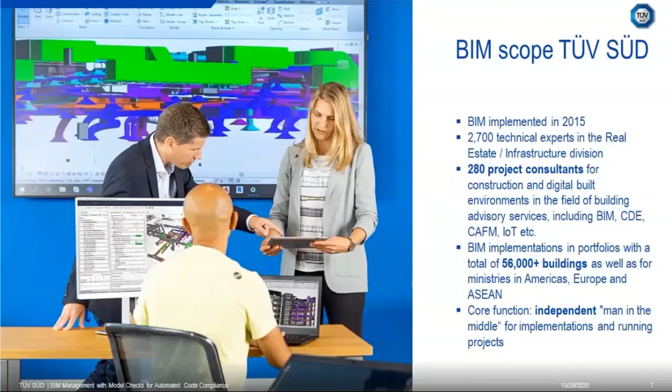TÜV SÜD implemented BIM in 2015, and a couple of you already know our local teams in Singapore and in India. In total, our group joined today 280 project consultants. And the interesting thing is we could really do a lot of R&D, but a lot of project delivery as well for a couple of the 56,000 buildings. And like I said before, our position is really to be the man in the middle. It means that we see ourselves as a knowledge gateway to all stakeholders that are involved in a single project.

And the interesting point is that our finding is that usually projects in Asia, when it comes to the digital quality and risk management and quality items, usually it's, how to say, an unspoken task for the BIM management. And here we see so many questions like what is checked, what are important items for BIM quality, or when a result is good, when it's bad. Also the question, how do I transmit the results to consultant and building owners?

So here's the question, is this a blame game? Like I find errors and I reject taking over the models. Is that really a valid game today? We believe not. So we face the fact that especially in Asia, all this BIM management and these model checking items, they are not standardized.

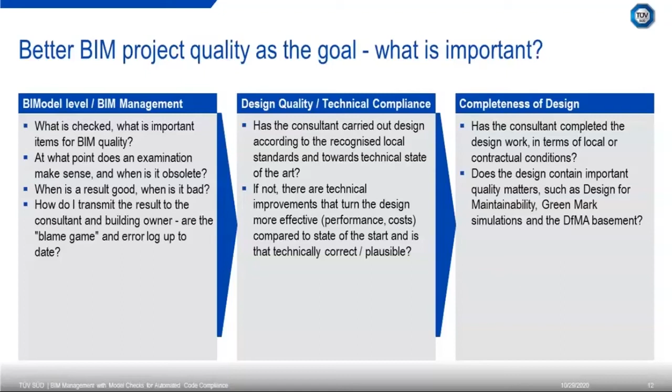So this chart is maybe the most important one in this webinar, because it should really highlight that the BIM is not the most important thing, but the quality of the design and the completeness of design. That's really the most critical aspects in our model checking workflow.

And to bring you some practical projects about why we so much engage on this completeness and design quality level, I brought some projects to you. So one is a sports stadium facility for a $65 million capex, and it should accommodate 12,000 guests.

We came on board during the fit-out phase, and here it was all modeled in different softwares. Explicitly, it was an IFC compiled by 8 different authoring tools. And the interesting thing, we found out that the fit-out design was only 72% complete.

And we found some performance errors according to Aircon and DFM. So this check was very important for all: for the building owner, for the previous consultant, for the current consultant, because with this fast check, which took like 10 man days, and some automatic checks, we avoided some financial harm for all the stakeholders.

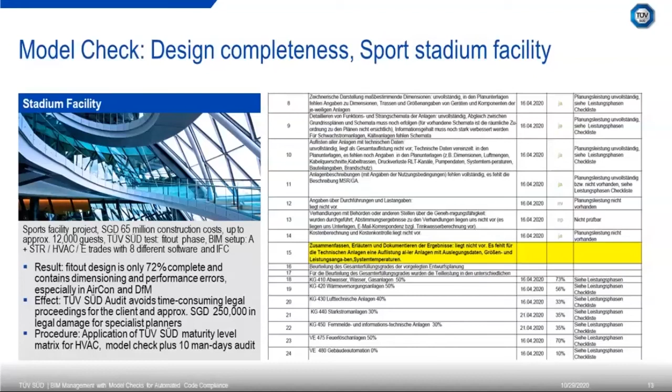And that's really a cool point, because usually for such big projects we would need over 2 or 3 weeks, right? But in a couple of days we could already highlight some of our findings, and we could guide the previous consultant in the right direction about what is completed, what's not completed, and so on.

And another one is a residential building. It's a smaller one, 3 apartment assets with 5,000 square meter GFA, like a chalet style, and that was in native Revit models, then converted into IFC. And here the finding was that with model checks, like you can see on the right side, we found so many layout errors that are not compliant to the local standards, so we helped the consultant with very immediate advisory about what to improve to have a design that's really compliant to local standards.

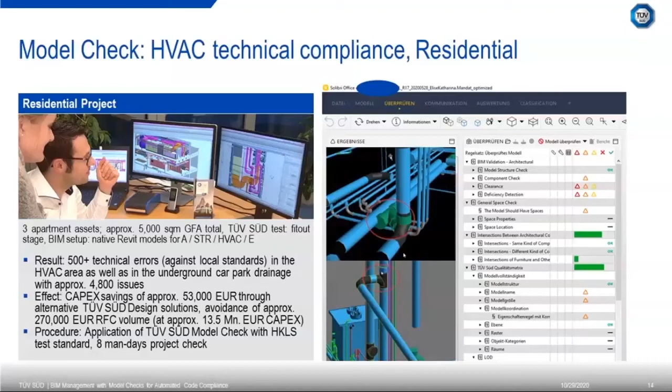And we asked our HVAC validation officers how long they would usually need for a project, and the feedback was 2 or 3 weeks. With model checks, it can really be done within a day, and then we had an 8 man day project check to find out how sustainability and so on could be improved, and that was done with Solibri as well. So that should bring some clarity to you about the completeness of design and design quality itself. Those are really major points for model checkers.

Here's a third one. Unfortunately, I recognize that the video doesn't play, but that's an interesting project we did for the Ministry of Social Housing in Brazil. We set up their dedicated project management with Solibri, and interestingly, that was for social housing. We validated some facade items, some handicap layout items, and so on, and that saves the authority 900 hours per month. For them, that's a really great achievement, because they have more projects than they can handle, and this automated code compliance, these automated design checks, really help the authority in Brazil to perform much faster and to embrace all these big construction programs.

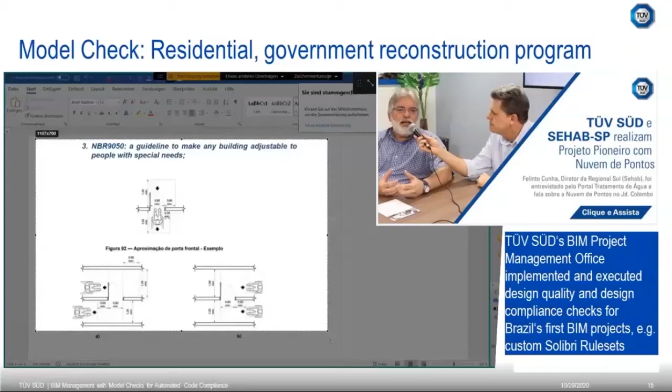So I brought these as examples that model checks are really not just to check the VDC quality of models, but really to work on the design level, on the technical level itself. Right, so summarized for us, it's a 3-step process. First, we need to have the BIM models checked on the virtual construction level, because like I said in the beginning, the BIM model itself is an information vehicle for technical layers, completeness layers, and so on. So the BIM model itself needs to be very accurately designed on the VDC level.

The second level is the design quality and the technical compliance. And the third one is the completeness of design. So we really call this lean management or lean design and construction, because the zero error principle is a very important item for IDD and DFMA as well.

So all these things are reflected in the BIM management packages that we have been building up, which may differ from what you usually see in Asia, because usually in Asia the BIM manager counts models and the BIM manager is the instance for VDC quality. But explicitly because of design items like completeness and quality, we have been building up different project management offices that also take exactly these things into account. We're taking the Revit or IFC models and checking the design itself on the technical level, sustainability level, CapEx level, and so on. So that's how we utilize the BIM model checkers as well.

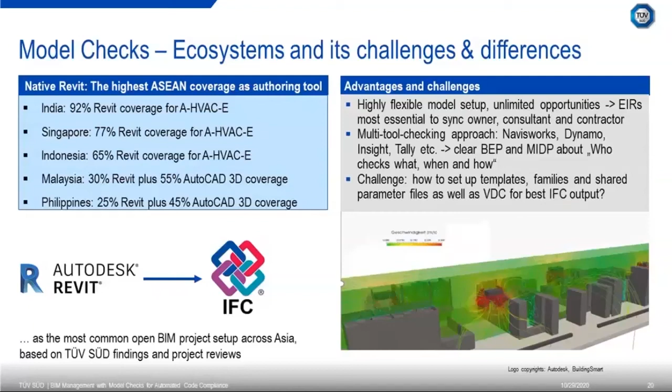Here we have a multi-tool checking approach. Autodesk provides multi-tools like Navisworks, Dynamo, Insight, Tally, and so on. So that requires as well that the BEP and the Master Information Delivery Plan is really accurate to see who checks what, when, and how.

That's really to be interpreted and defined for every single project. In contrast, IFC is much easier to be honest. On the IFC level, we have a fixed scope based on the ISO standard, based on the current IFC 4.0 or 4X implementation stage. So here we don't need to discuss about nomenclature, structures, and so on. That's a fixed structure of parameter sets, of geo-structures, and so on.

The critical item is, and a lot of people do this wrong in Asia, if you go for IFC, don't make custom rules. IFC is really good when it's a plain, clean, original IFC. So here it's essential to have synchronization with all of the trades, because all trades need to fulfill the same quality, the same structure of IFC, and they should not try to rope in their individual model structures and so on.

Based on our findings, that's a contrast to the Autodesk ecosystem. So for checking IFC, we find that Solibri is the best-in-class solution, because when we validate different checking tools, we see that Solibri has the most plain, the most accurate, and the most clean IFC code inside.

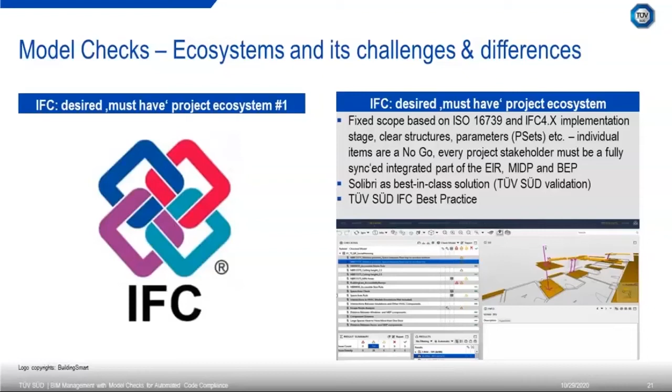Solibri is really, based on our opinion, a best-in-class solution, and that's why we've been developing some checks, especially for this highly interesting IFC, exactly based on this Solibri solution.

About the IFC level itself, you all know these different challenges on software level, or user/author level, owner and employer level. IFC might look like a standard, but you all know that different software tools have different IFC scope implemented. On user level, there are trainings for programs, but not for IFC itself.

So for IFC handling, there is no training, and we have changed that, by the way. On owner and employer level, I already highlighted that if you really go for IFC, owners from industry or REITs should not go for the individual setup.

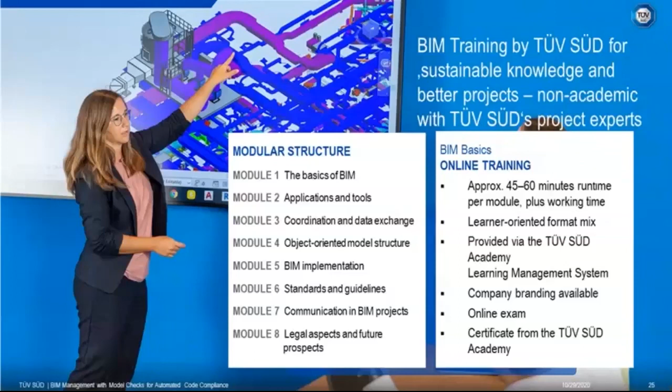So another question is on the right side: would you see an interest in BIM trainings held by international project experts, because that's what we plan. We don't plan to do trainings with academic people who have never worked with BIM models or with IFCs, but this training should be set up by our project experts like Elise or our other colleagues. So here you can poll again if this is interesting for you.

And now I would like to hand over to Elise, who would take you on a journey on the technical level down to the solution itself.

Thanks, Tobias. Hello, I'm Elise Mandat, BIM consultant at TÜV SÜD Advimo since 2018, and I come from the field of planning and architecture, as Michelle already introduced. I have also worked as a BIM expert in quality assurance and planning, and also in construction.

Today, I'd like to introduce you to the way we examine the issues that Tobias just discussed. You're probably excited to see the model checker in action. So here you can see TÜV SÜD's Solibri dashboard, where an automatic check of the 65 essential quality and risk aspects in IFC projects is carried out.

All the checks run simultaneously in selected project models, usually several instead of just one BIM model. This also means a great deal of time savings for our customers in issuing a report of the results.

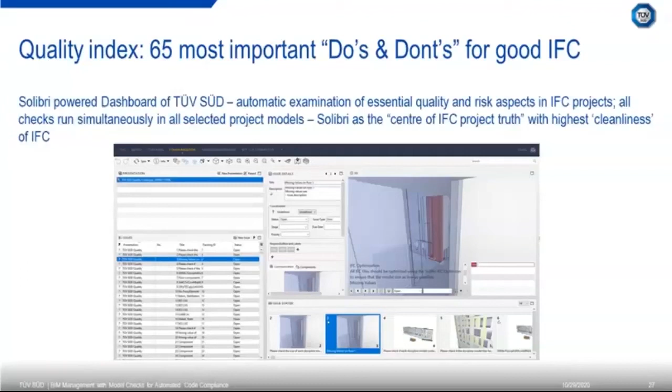Our TÜV SÜD experts have defined around 65 planning errors that frequently occur in architecture, structural, and technical building equipment models. So this review focuses not only on individual planning models, but also on the correct integration of all the trade models together.

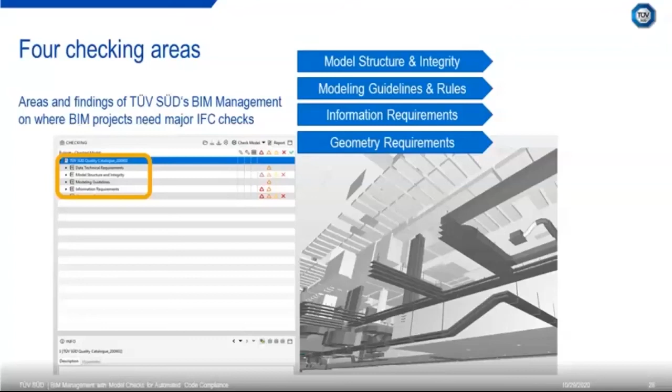So together with Solibri, we have grouped these rules into 4 main categories: model structure and integrity, modeling guidelines and rules, information requirements, and geometry requirements.

As TÜV SÜD, we receive many high-quality BIM models for large projects, which is a good thing. These projects often include 10 to 15 different trade models, all in one coordination BIM model. But even if the planning is of high quality, there are often major risks that occur within these BIM models. So what can go wrong with these BIM models?

And I see that we just received another polling question on your right-hand side. If you'd like to answer while I speak: how would you rate your current BIM in-house competence? So, what can go wrong with these BIM models?

First category: model structure and integrity. These risks are divided into these 4 main testing categories. Surprisingly, in model structure and integrity, the main risk is that the same building we're talking about is defined by the trades with different world coordinates, different levels, or different degrees of detail, which means it's not really the same building that we're all talking about.

In addition, the components must be defined using the same naming standards so that they are universally identifiable among all trades. For this, we use the IFC standard. It is essential to check that all elements are defined according to their IFC entity. Without this consistent structure, there is a risk that the trade models will not be coordinated correctly, and it will cost much more time in BIM management. In the worst case, the models may even have to be remodeled.

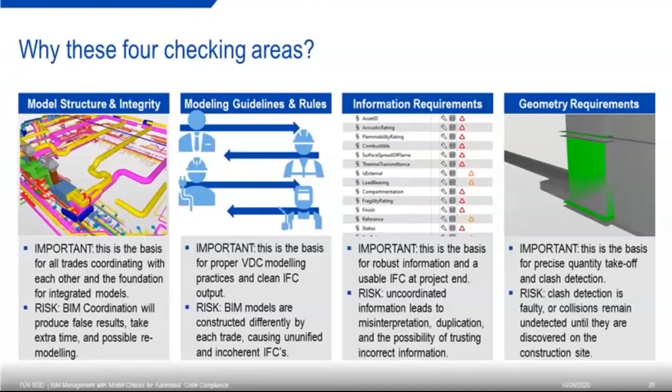For us, complete transparency behind the result is important. Here you can see the detailed protocol with all results and an analysis of the 4 main test categories that we produce. In this way, we validate positive issues with the modeling, whereby we also highlight risks and opportunities for optimization.

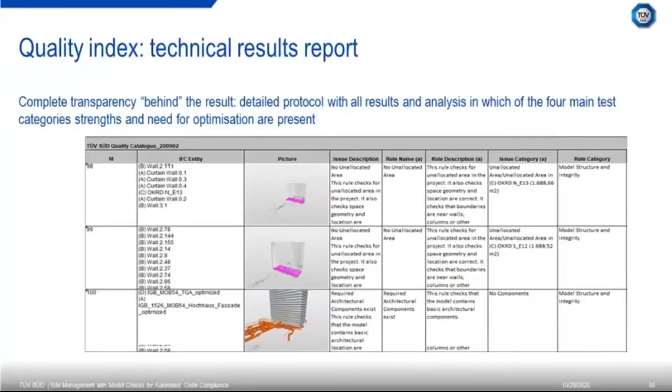From this report, we derive 4 risk classifications for you according to the ISO 31000 international standard. These risk classifications show you how your project is currently performing. C1 is the highest risk because the BIM model lacks all data. C4 means the lowest risk. As there is never a project in ISO 31000 where there is no risk, our customers often translate this level as everything in the green zone.

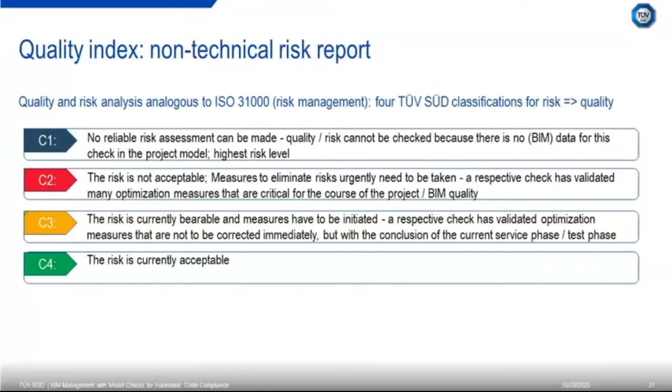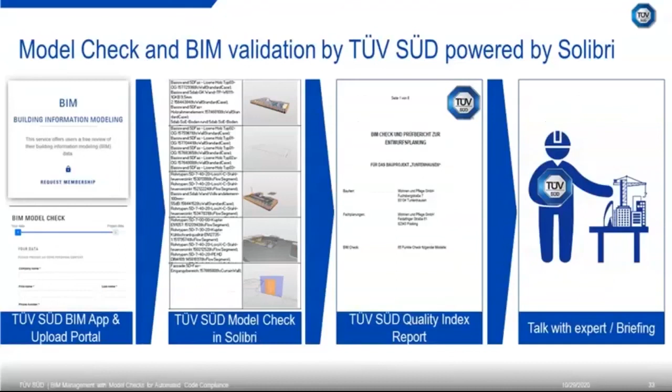Since a pure report isn't sufficient to explain issues for complex construction projects with BIM, we combine the model check and the quality index as a report with accessibility directly to our team. In this way, we ensure that we really integrate best practices into your project, that we do it along with you.

So what is the delivery of our check? We have 3 different parts of the deliverable. The first is the quality check and index report. This is for owners. It is a basic translation of the issues in the form of a benchmark.

The second is a detailed report and BCF report of the issues. This is a technical report for consultants and contractors. It is a deeper dive to understand the reported issues found by the model checker.

And thirdly, we have a technical compliance check, what is traditionally known as design review. This is for highly complex or risky projects, which we offer on top of the basic IFC checks.

Here I will take you through 10 or so concrete examples of checks that the model checker performs. One of the strongest benefits of the IFC checker is that it gives us the ability at any point in the project to very quickly see what's going on.

No more wondering how the trades are coordinating, what information is missing, what elements are duplicated, or what systems are incomplete. Here with the click of a button, we see the intersections of all components in the MEP domain that are clashing. I could just as easily perform the same check for architecture, structural, or even a different check to review the completeness of information.

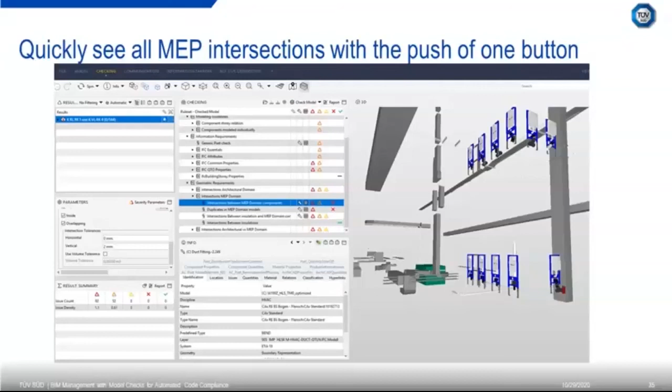We can also quickly identify duplicated elements. What can the major issue be when elements are duplicated? It can lead to faulty quantity takeoff, where elements are counted twice. Or it can lead to incorrect planning when an element is updated by one trade and not by the other. Which element then do we trust to be correct? This leads to confusion and, at worst, the necessity for remodeling.

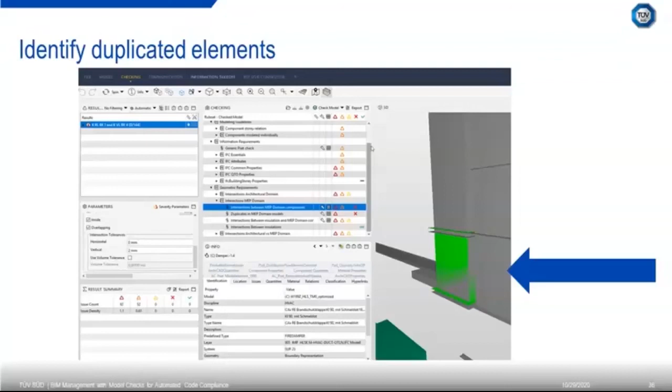In the same way, we use the model checker to monitor that a clean and perfect room program is kept throughout the project. To which room do objects belong? This is important all the way from planning through construction and into facilities management.

We also perform fundamental coordination checks, such as if the project base point and rotation to true north is exactly the same for all trades. As we see in this example, it is not. If this is not correct, the project cannot proceed, because then we do not have coordinated models. We're not talking about the same building.

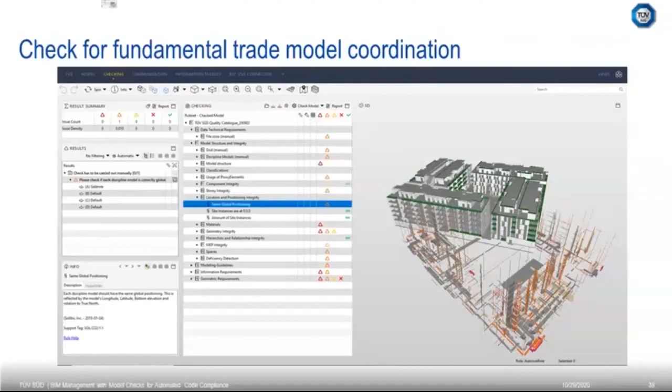The model checker can verify actual material thicknesses. Previously, with paper planning, material quantities were always defined apart from the planned object itself. Here, we truly harmonize the planned object with the amount of material that is called for. In this example, we see the definition of the material is 90 millimeters, but in fact, its information definition states 0 millimeters. This will lead to incorrect quantity takeoff.

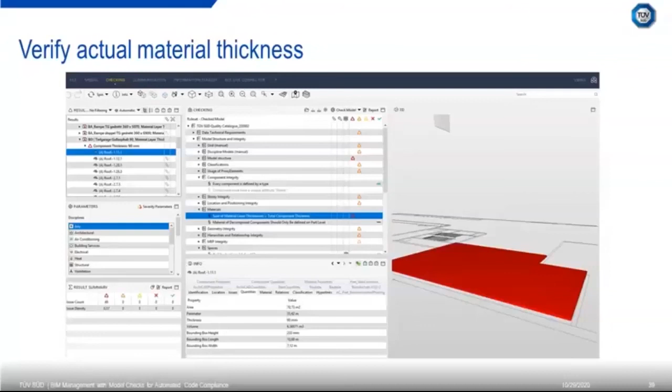We also check whether every element is defined by type, thus correctly categorizing it in relation to all other elements. In BIM, we must make sure that we are modeling in a way that the computer understands. And the first step to this is defining all elements by their most general category. This coincides with each element's IFC definition as well, which categorizes it in relation to its IFC entity definition.

Often we find that elements are modeled with the definition IFC proxy element, which basically means the modeler forgot to define the element's category. If this remains so vague throughout the project, the elements will be missed in clash detection, quantity takeoff, and will not be properly defined in the facilities management system when the building is finished. This is a fundamental check that can lead to many problems if left unchecked.

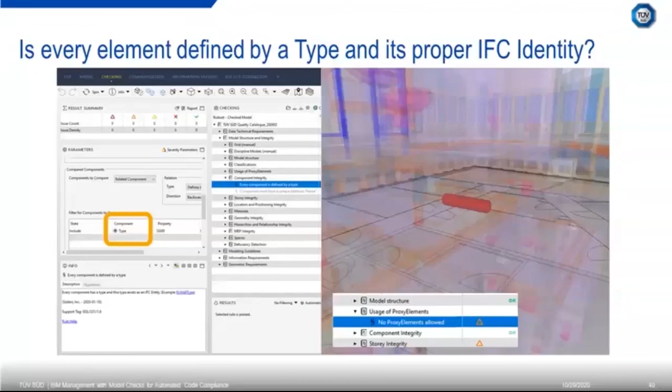Here, we are checking for too much detail. For example, we see here the texture on the door and the lettering on the equipment. Each line drawn in the authoring software adds to the size of the file. So objects, especially those that come directly from a manufacturer, you download it off their website, contain a lot of detail and oftentimes much too much detail, which slows performance and causes anyone working in the model to lose time. This can be many man-hours if it's added up.

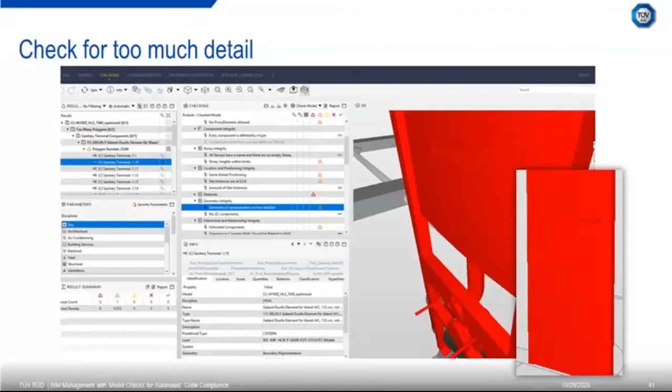Here we are checking that the levels defined are those that are used unanimously by all trades. We have found here that there are empty levels, meaning some trades have defined their own levels. In this case, it is not to the point where building objects have been referenced to the ununified levels. But in this check, we would flag the issue and recommend that the empty levels be deleted to avoid that very risk.

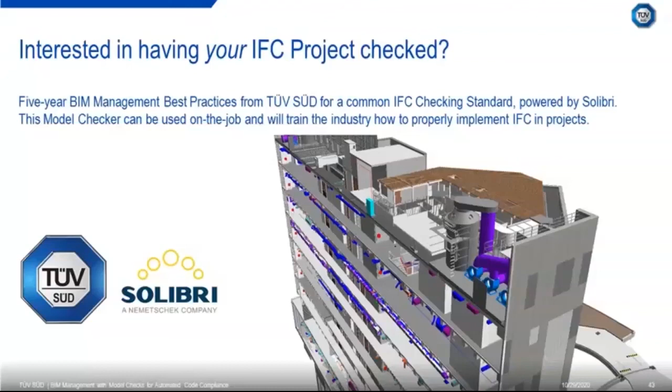Great. Thanks, Elise, for this technical insight. So from our technical point, I hope that this 40 minutes journey through our findings on project level when it comes to quality and risk management and this journey into our model check itself was exciting for you. Probably you gained some more interesting aspects you can integrate in your next projects.